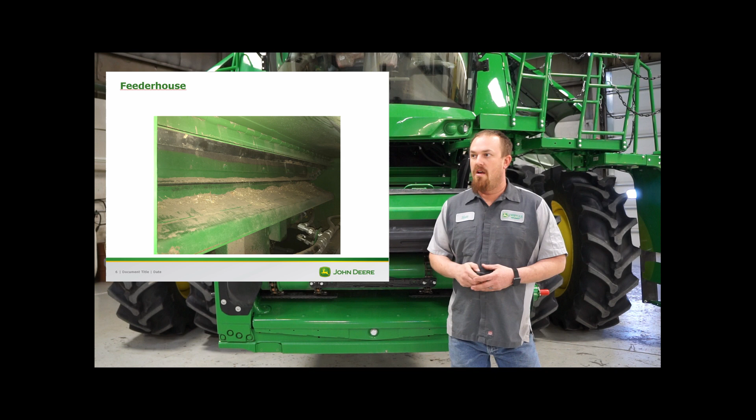On my next slide, I've got a picture of the stone trap, the rock trap. It's very important to open this up every night before you go home after your harvest day. As you're going through the field, it collects all the stones and other large objects that could potentially hurt your rotor, your feed accelerator, and stuff like that inside the combine. So when that fills up, it needs to be emptied. If it fills up and you don't empty it that day and you keep harvesting the next day, all that stuff is going to go right into the rotor and start breaking tines off. So you need to be careful to empty that every night.

On my next slide, we're going to start talking about the separator and all the key points of that.

On the next slide, we've got a picture of one of the top covers. The top covers on the S-Series, 9770s, any of the rotor machines, are one of the high wear points on it. They like to wear on the front left corner and get a hole in it. A lot of people have put a patch over that as a temporary fix, and that's okay - it'll get you through harvest. It takes a long time to change out those top covers, so you don't want to be down during harvest changing them out. So most people just plate that instead.

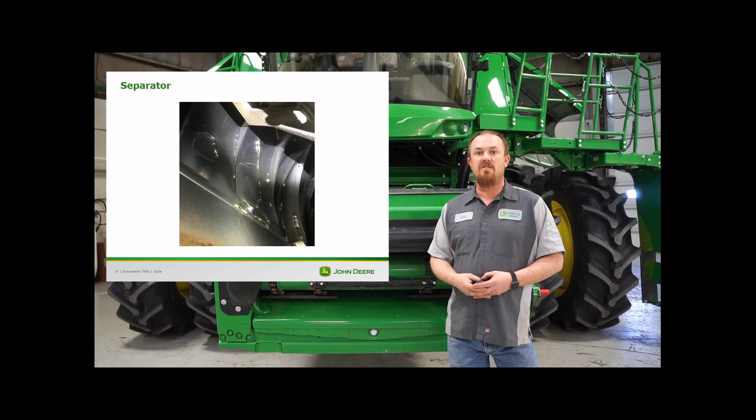On my next slide, you can see a better picture of those holes that develop in that top cover. When those holes get large enough and have been plated over, that top cover material will start bubbling out. You can see a couple places where it's bubbling out and crop material is getting stuck behind that. When that starts bubbling out, it interrupts the flow of crop and straw and stalks moving up the rotor, so it doesn't feed as well. Also, you'll see on that same picture there's some fins on that top rotor cover, and one of them is bent. When those bend, because everything's getting thinner and weak, it keeps stuff from flowing up. Those fins are what flows material from the bottom of the rotor all the way up to the top, so when they bend, it interrupts the flow and doesn't feed as well.

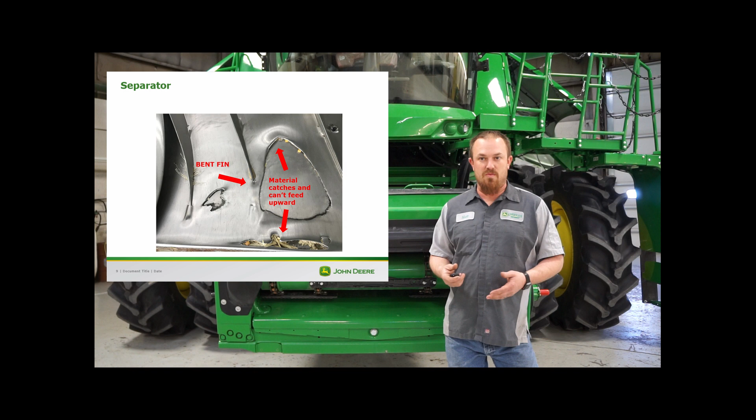The teeth of those feed accelerator wear strips will not grab the straw and stuff as it's coming through, and it won't feed as well. You can flip them once, and typically you can get another season or two, a couple of years out of them, and prolong their life. After you've flipped them once and the height starts shortening, it's time to replace them.

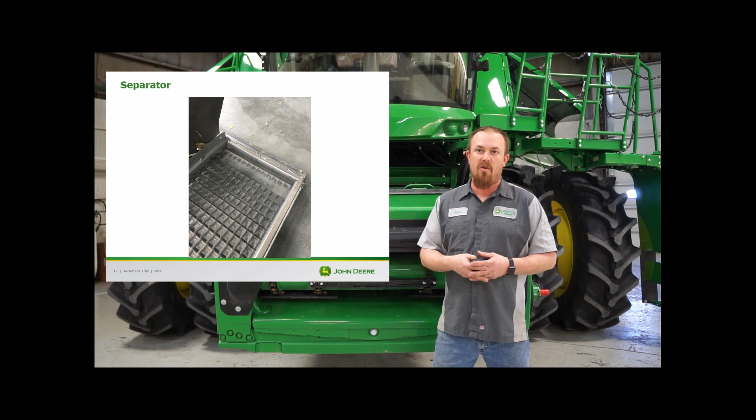On my next slide, I've got a picture of the new style moisture sensors. This new style is very easy to clean and maintain. The picture of the auger on the left - typically in milo and crops like that, it'll gum up. If you're having issues with your moisture sensor, it's 2 pins and you can pull that auger out and make sure it's good and clean. The picture on the right is an actual picture up from the bottom of the moisture sensor - you can look up in there and make sure it's all good and clean, so you're sure it's reading the right moisture as you're going through the field.

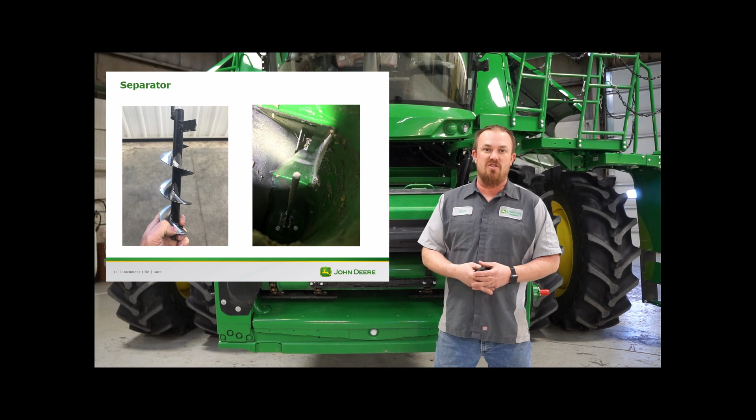On my next section, we're going to talk about greasing the machine and what kind of lubricants you should use. My next slide is a picture of the greasing decal on the left-hand side of the machine. These are located right underneath the concave closures. Basically, it hits on every point except for what's on the feeder house on the left-hand side of the machine.

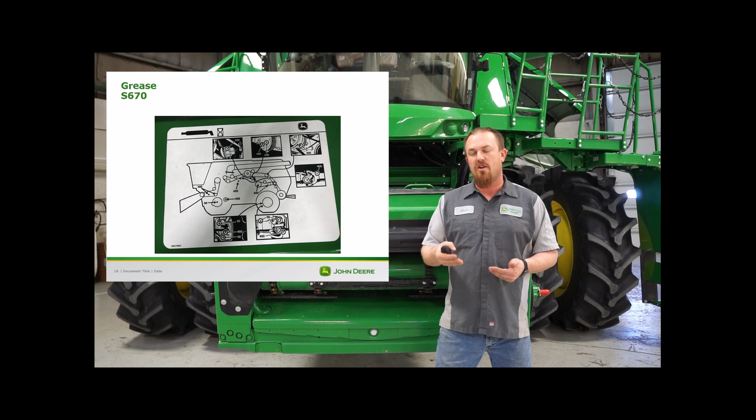Most of these grease points are 400 hour or 50 hour. There's not very many 10-hour grease zerks on this machine. I know a lot of farmers really like to grease their machine every morning when they show up to the field, going through their startup process, fueling up the machines - they like to have somebody going through and greasing everything. That's okay, but cut down how much you're greasing it. Most of the 400-hour and 50-hour grease zerks are 10 to 15 pumps each time you grease it, so if you're greasing it every day, 1 or 2 pumps will be good.

On my next slide is the right-hand side decal. Same thing here - a lot of them are 400 hours or 50 hours. Same thing, if you're going to grease it every day, 1 to 2 pumps is plenty good.

My next slide is a picture of the reverser and how to properly grease it. There are 2 grease zerks on the reverser. You want to set those at 12 o'clock and 2 o'clock. When they're at 12 o'clock, grease that top grease zerk about 5 to 8 pumps if you're greasing it every day, every 10 hours of operation. The 2 o'clock one, you want to do about 3 to 5 pumps, again if you're doing that every 10 hours.

The 2 o'clock zerk can be over-greased. If you over-grease it, say you put 15 or 20 pumps in, or you're using an electric grease gun and put a lot of grease in it, that grease will come out between the sheaves and get on the belt, potentially ruining it. The 12 o'clock position, you can't over-grease. That grease just comes out underneath that spring and goes out. It won't hurt anything there.

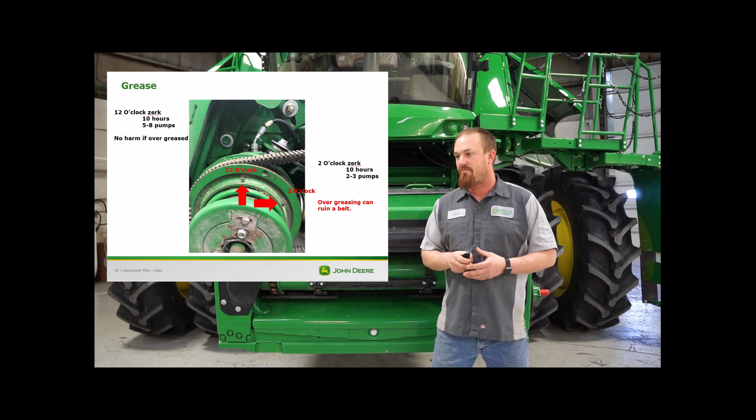My next slide is the upper variable drive. These grease zerks are kind of hidden unless that top variable drive is turned just right. You can reach behind there and feel for them. What I do is turn that pulley until those grease zerks are at the very bottom, and then you can see them underneath. You want to grease those.

My next slide is a picture of the reel pump and the reel pump carrier. Again, this is a 400-hour grease zerk. I recommend greasing it every day, 1 to 2 pumps is plenty. You're not going to over-grease this. So if you put 4 or 5 pumps in there, if it feels like it needs more, go ahead and put those 4 to 5 pumps in.

In the past, this is notorious for starting fires on combines. Those bearings will go bad, and there's chaff and debris stuck behind there because of a little cavity, and it can potentially cause a fire if those bearings go bad. That's why I recommend greasing it every day rather than waiting for the 400 hours. It's also kind of a hidden grease zerk, so it does get missed quite often. Just make sure you get to that one.

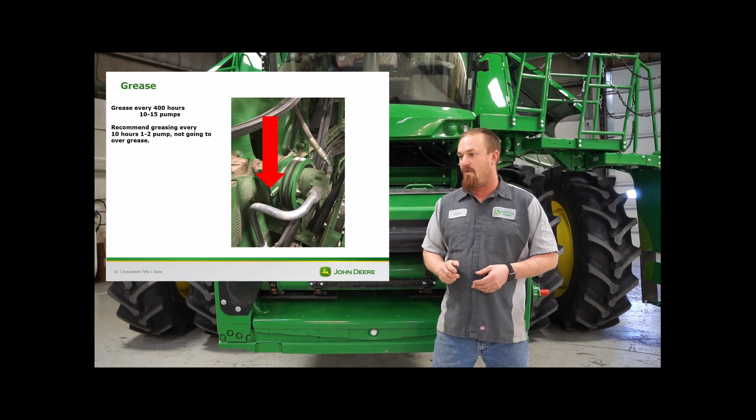My next slide is the rotor variable drive over on the left-hand side of the machine. There's a plug in the side of that, and it's at an angle. It's a 400-hour grease, and I recommend doing that every 400 hours. I wouldn't recommend doing it any more often than that, and it's going to take about 40 to 45 pumps of grease. It takes quite a bit of grease to go in there.

That's 400 hours, like I said. Once you get done, you're going to have to pull that plug out and put a grease zerk in. When you're done greasing it, put that plug back in so you don't over-grease it. If you over-grease that, grease is going to come out between the shivs and you're going to ruin a rotor belt. Those rotor belts aren't cheap, so you definitely don't want to over-grease that and ruin the belt.

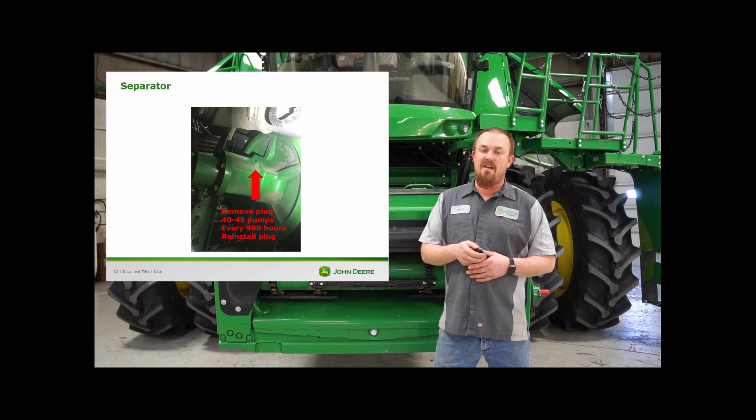My next slide is the chopper jack shaft. This also runs the pump for the spreaders if it has a spreader. Every machine has it, even though it's called the chopper jack shaft—even if it doesn't have a chopper, it still has this jack shaft. There are 2 plugs on it. I've got a picture of the front side with the plug. That plug, you're going to pull it out and grease it, and you can leave the grease zerk in on this one.

Also, there's one on the back side. You don't have to grease both of them, but it's a good idea to at least put zerks in both so that it does get greased. This is also a 400-hour grease zerk. I recommend greasing it every day. The outside of that has a belt on it, and that bearing gets quite a bit hotter because of that belt and the friction there.

My next slide, I've got a picture here of a Lincoln luber. These are automatic lubers, a very, very easy and efficient way to grease the machine—by far the best way to grease it. The Lincoln lubers, the automatic lubers, will grease the bearings as they're hot and as they're moving, which is the best way to grease a bearing.

You don't want to be out there stopping halfway through the day to grease your bearings while the machine is running - it's kind of unsafe to do that. With these Lincoln lubers, they'll grease it for you and you don't have to worry about it. There's a few grease zerks you still have to get to, like the Feederhouse ones and the rotating assemblies. But greasing 5 grease zerks every day versus greasing 50 saves you a lot of time in the mornings.

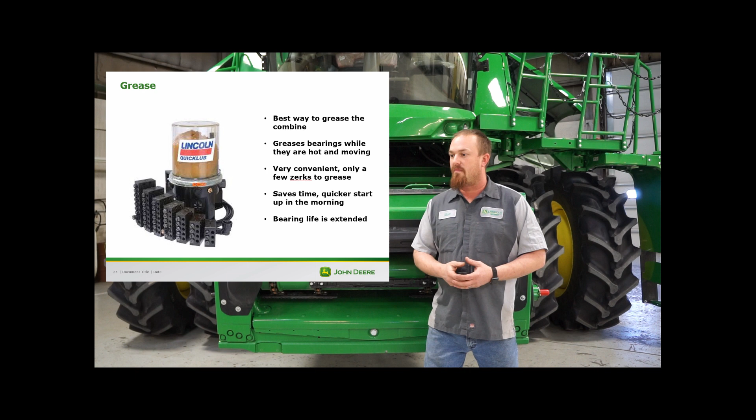On my next section, I'm going to talk about the very cool fan drives. Not all of the combines have them, but most of them do anymore.

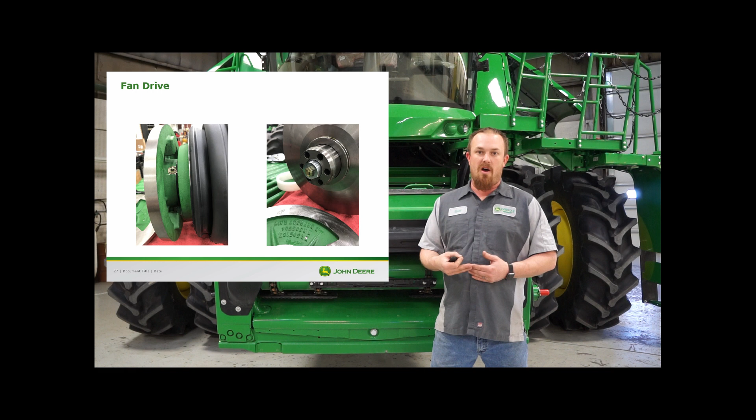On my first slide here, it shows a picture of the grease zerk and the vent out the end. When you grease this, if it's been recently serviced, like the bushings have been changed, it's going to have synthetic grease in it. They used to have cornhead grease in it, so if it hasn't been serviced for a while, it's going to have cornhead grease in it. When you lube it, you need to put cornhead grease back in it. If it's been recently serviced, you need to put synthetic grease back in it. When you grease that, a couple pumps is all it'll need, no more than 5 pumps, and it can come out the breather on the end - that's okay. Make sure you rev up the combine and slow it back down after to cycle those shivs.

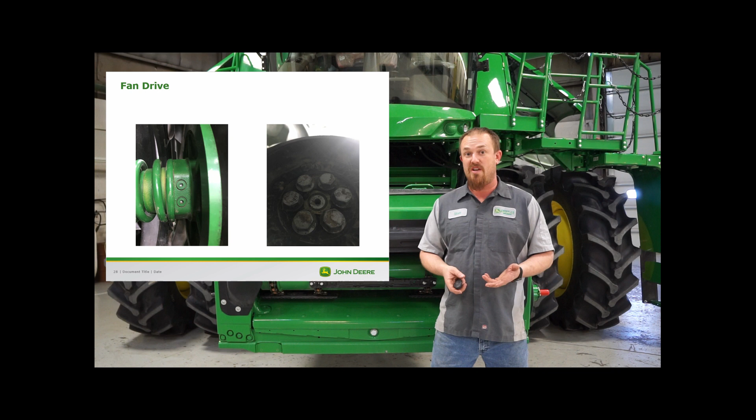On my next slide, I've got a picture of the driven assembly. There's a couple plugs on those and a vent on the end. We've been telling guys to go ahead and pull one plug on each side of the shaft out and put a grease zerk in, and you can leave those grease zerks in. Same thing on this one - if it's been recently serviced, it'll have the synthetic grease in it. If it's been a little while, it'll have the cornhead grease in it.

The way that we've done our estimates is by line item, so replacing one item will have a parts cost and then a labor cost with it. Sometimes some of those will overlap, and so when we go over the combine estimates with our customers going around the machine, we let them know that these two will overlap and it'll be a little bit cheaper and stuff like that.

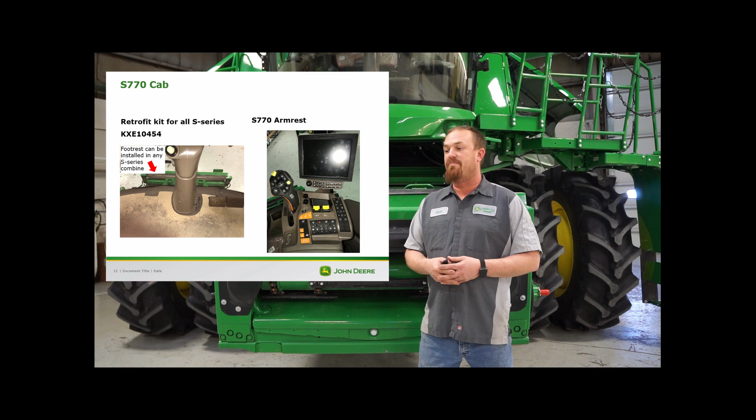Also on this slide, I've got a picture of the S770 armrest. There's a lot changed on it - the buttons are totally different, they're a lot easier to push. This armrest is a lot easier to run than the older ones are, so I wanted to attach a picture of that.

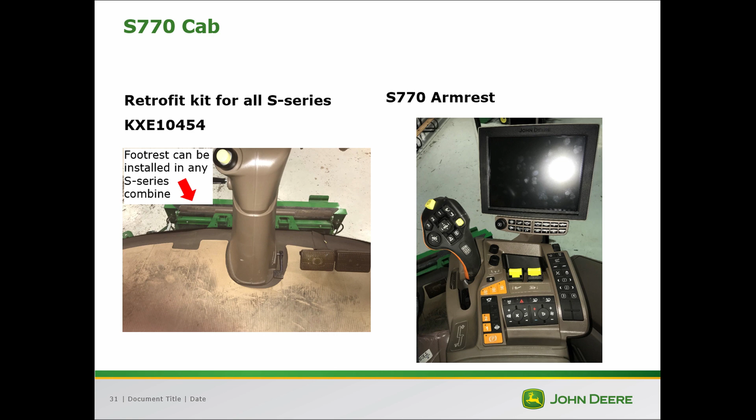That concludes my presentation for the service part of our combine clinic.